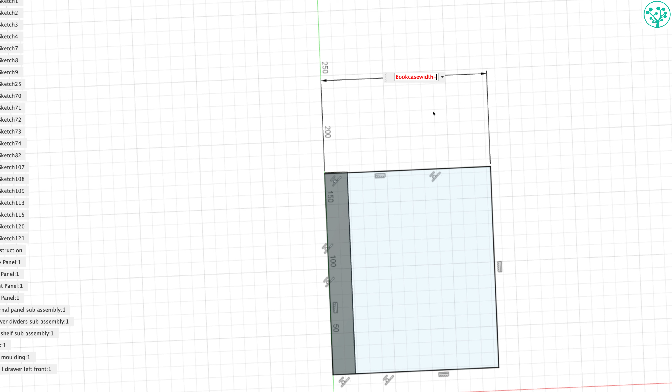Now we need to look at the back of this here, and I do want to give that a dimension. So I'm going to come into my sketch dimensions tool at the top here, click on that top line and raise it up, and I'm going to call this the bookcase width. Now remember, on our bookcase we put a back panel on here that was 12 millimeters thick, and that's set. No matter how big this bookcase goes, my back panel will always be 12 millimeters thick.

So I'm going to take away from my bookcase width 15, so it allows that back panel and gives me a bit of clearance there in the back of the bookcase. Bosh. So that gives me my distance of 250, and as my bookcase width resizes, that will always resize as well, and will always be 15 millimeters from the back. So I can now finish the sketch.

So now we're going to give this some thickness. Come up to the create command, select the extrude command, or press E on your keyboard. We want this to be a new component. So let's select what we want to extrude. Well, it's that face. Now as always, it's missed out that part where the intersect line is, so remember to select that as well. And now drag the arrow in the direction.

And you can see this now wants a negative number. It says -20 at the moment. If I dragged it the other way, it wants a positive number. And very often I type in there just stock thickness, forgetting the negative number, and it sticks out from the drawer, not in. So minus stock thickness, and then okay.

We now get a new component down here, and you can see that those two boards are intersecting. And if you've made dovetails in the past, you know that's exactly how you would size that board. So we're in reasonably good shape there, I think.

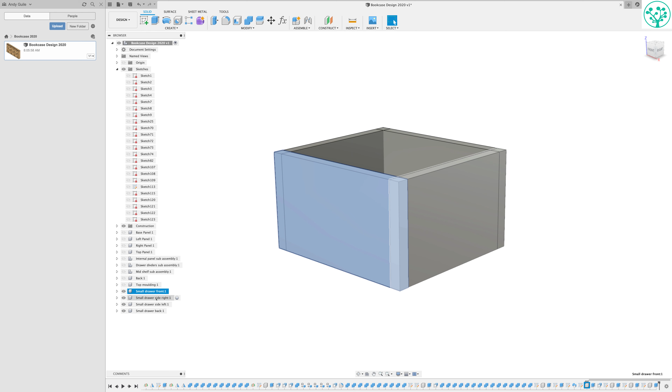I've just renamed those because the convention was getting a bit messy. So I've now got a small drawer front, a small drawer side on the right, a small drawer side on the left, and a small drawer back. Happy days. Now let's come back in and unisolate everything else. Remember, we're working from the front, so right click on the front, unisolate, and our cabinet now comes back, and you can see that our drawer is fitting in there reasonably well.

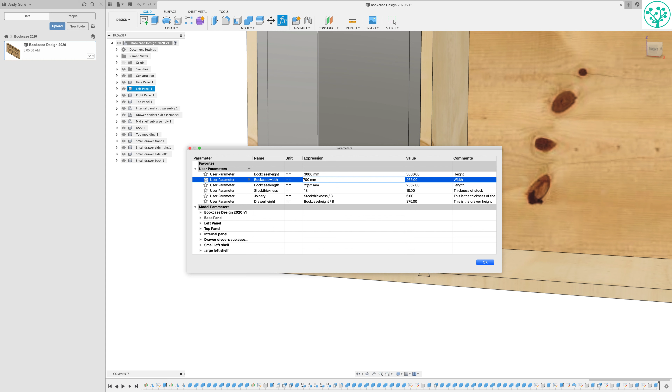Let's check our constraints are working. So let's make this 3,000 millimeters high. Let's make it, slow today, Fusion, 700 millimeters thick for a laugh. Let's make this one, I don't know, 6 meters long. Oops, that's it. 6 meters long, and let's make the stock 25 millimeters thick. Okay.

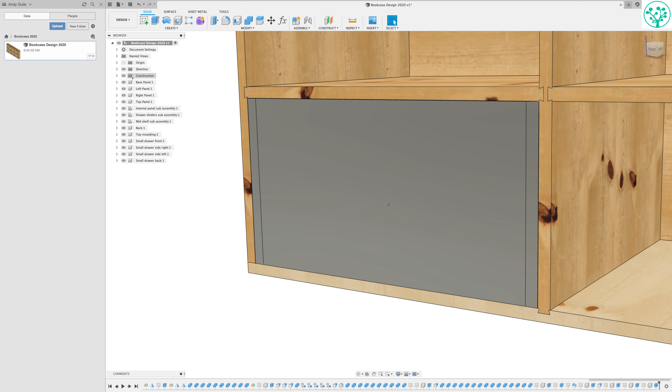And you can see all that's resized, and if I was just to turn everything off for 1 second, you can see that's resized perfectly as we would expect it to. Happy days. Now the next thing I want to do is to put in place the drawer bottom.

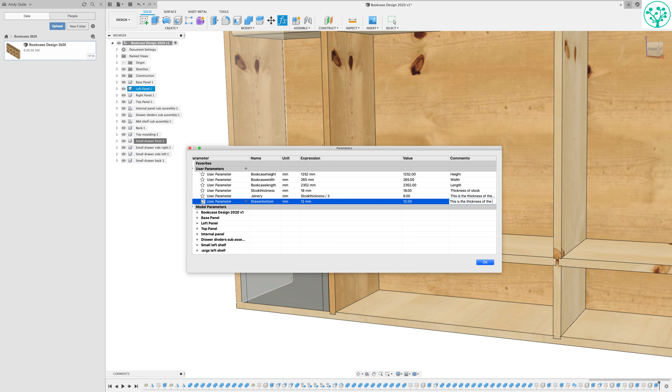I'm going to create a new constraint, and we'll just set this one, I think, to 12 millimeters. Should be thick enough, I think, for that base. This is the thickness of the drawer base. Okay, cool. Now I want to isolate everything again, so come back to the small drawer front, isolate, and then just turn the rest of the drawer on.

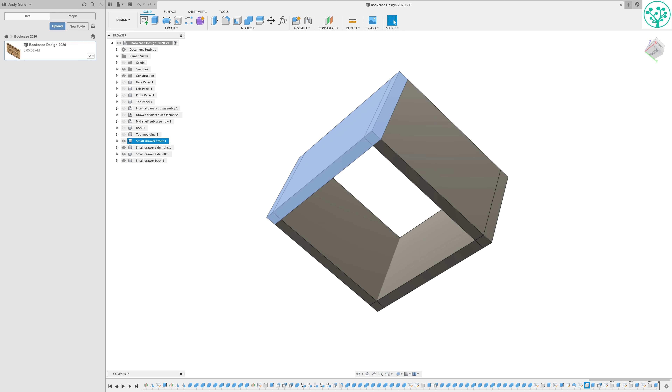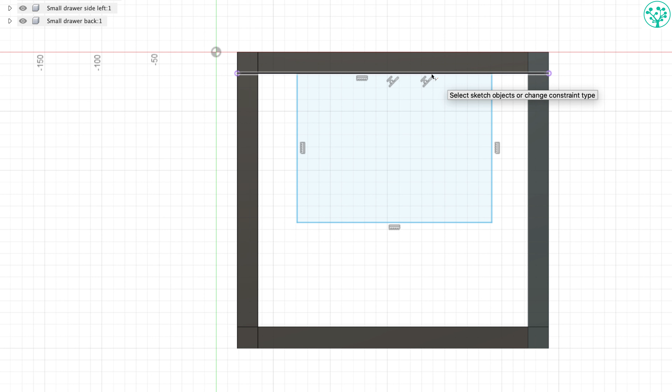What we want to do now is to create a drawer bottom in here, and we know we want it to be rebated into the side. So we're going to come in to the base of the drawer, and I'm going to create a sketch. And we're going to use exactly the same technique, coming with a rectangle, a random rectangle, and I want to constrain this to the inside edge of this drawer.

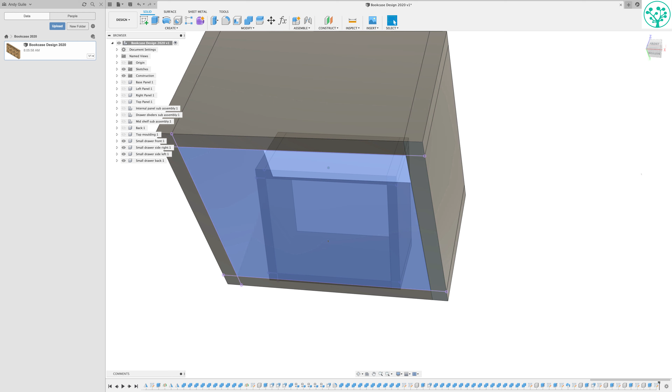So go into the collinear constraint, click on the top, click on that edge, click on there, click on that edge, click on there, click on that edge, click on there, and click on that edge. And that's now created a drawer bottom that's constrained to the inside of the drawer. And we know we can resize this by using the offset tool, which is absolutely perfect.

So we're going to finish the sketch. So I now want to extrude this up, but I want to just talk through a little something first of all. I always want this drawer to be referenced to this base, but I don't want it sat on the base. So I want to find a way of offsetting this in some way, shape or form. There's a few ways we can do that. We can use construction planes and other ways, but let's look at a really super simple way.

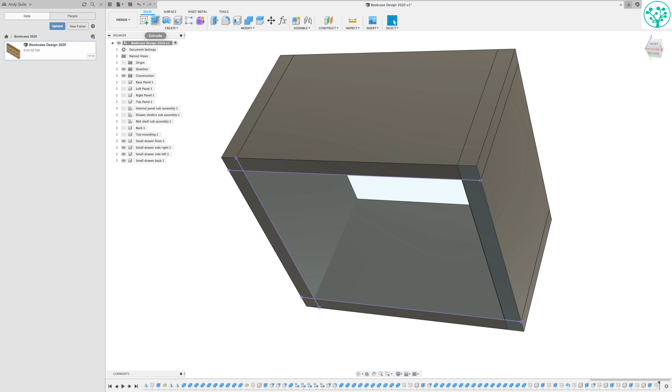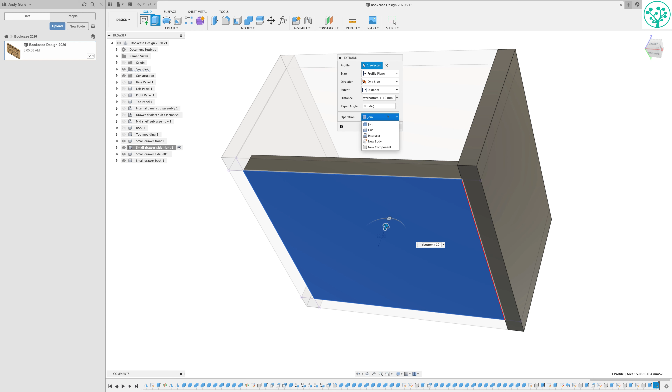I'm going to extrude this, but the way I'm going to do it, I'm going to extrude it up by the base thickness, that 12mm parameter we've just set, plus 10mm, which is the offset I want from the base. Let me show you. Click on your extrude command, click on the thing you want to extrude, which is the base panel, and push it up. So I want this to come up by, and it's a minus quantity, minus the stock, minus the drawer bottom plus 10.

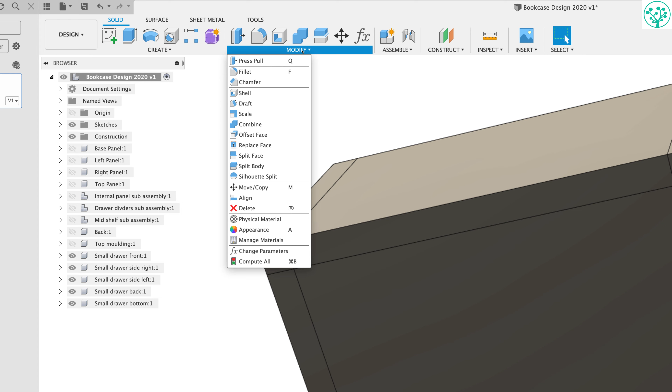Now what that'll do is give me a super thick 22mm in this case bottom, and remember we want to create a new component. Bang. We're going to call this now the small drawer bottom. Now we've got a super thick base inside here. We know that's 10mm too thick, so guess what I can do? I'm going to offset it.

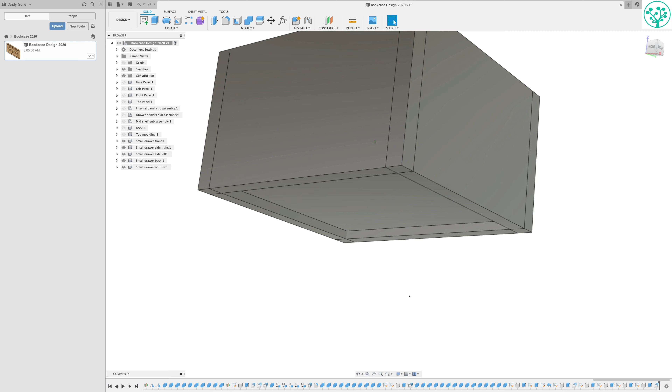I'm going to go into modify, I'm going to offset. I want to offset this base panel and I want to push that up by 10mm, minus 10mm. So that now gives me a base that's 12mm thick in the bottom of our drawer here, that's constrained by these 4 sides, so it will always be the right size, and it's constrained by this bottom face but offset by 10mm. So that base will always be 10mm from the bottom of our drawer and always be the right size for the drawer. And that's a super quick technique I find of actually doing that and making things resized.

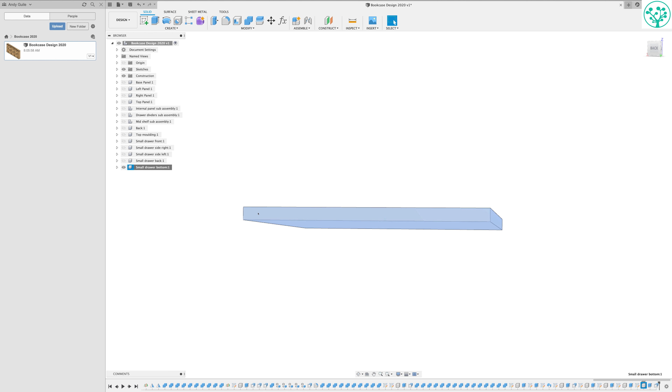So let's just work on the drawer bottom. Let's isolate the drawer bottom. Isolate. So I want this to stick into my sides by 1/3 of the stock thickness, and we know we've got a parameter called joinery that does that very thing for us.

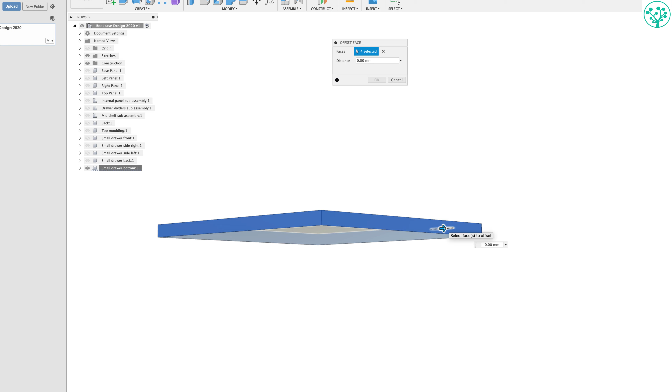So let's come to modify again. Let's come to the offset faces, and I want to offset that face, that face, that face, and that face, and I want to make this bigger by the joinery. And remember, joinery is a parameter, stock thickness divided by 3, 1/3 of the stock, which is perfect. Dunk, and then press OK.

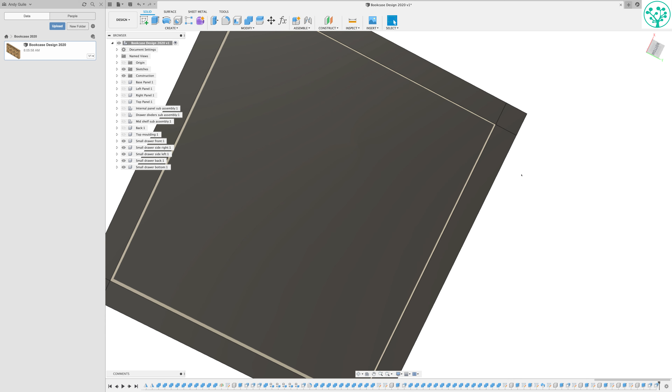So bring back in the rest of the drawer, and if I hover on the bottom, you can just see that shadow line appearing inside the drawer there that says, yep, that's bigger than we need it to be. So guess what we do now? I now want to cut the rebate, and to do that I use my old friend the modify tool.

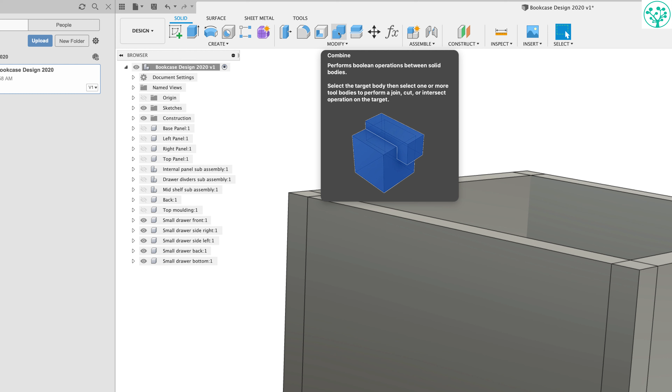Underneath modify we have this combine tool. Performs Boolean operations between solid bodies. Select the target body and then select one or more tool bodies to perform a join, a cut or intersect operation on the target, and it's the cut that we're interested in. Now this is the command I had feedback I went too quickly, so let's slow this right down again.

First thing we do is we come along and we select the tool, combine tool, and it brings up our menu. Now a target body is the thing that we want to cut into. Remember I call this the router tool. This is the thing that we want to route the rebate into. The target body is the thing we want to cut. The tool body is the thing that we want to use to make the cut. That's the router bit. And the operation, you can either join things together, you can cut them, or you can create an intersect point, and we're interested in the cut command, so we're going to cut.

My target body is going to be any one of these edges. Let's pick this one here. My tool body is going to be the base, because I want that base to cut into that side panel to make the rebate. Select. I want to keep the tool, I don't want to lose a drawer base after we spent so long making it, so we click the keep tool and OK. Now that's put that rebate inside there.

This is the small drawer back, so let's just turn everything else off for a second and look at the small drawer back, and there you can see it. And that's given me that perfect rebate that we can only dream of making with our woodworking tools in that drawer. Fantastic. Actually stopped rebate, blind rebate, I think. Perfect. So let's now do the other sides in the same way. So just so I don't get confused, I'm just going to turn off the one I've done, so I'm turning off the small drawer back there.

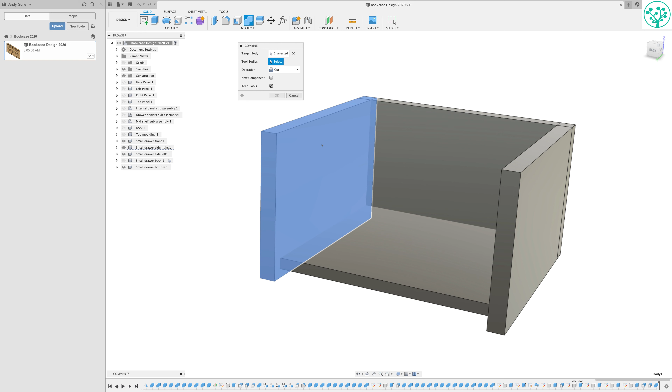Okay, now I'll come back to modify again, select my combine tool, or right click on your mouse and you can reuse the short command, that repeat combine here. Same thing, gets you to the same place. My target body is going to be this side. The tool body, the router bit, is going to be the base. It's remembered that I'm using cut commands, and it's remembered I want to keep the tools, which is great, but always check that. Okay. We now need to do this back piece.

Right click, repeat combine. My target body is that back panel. My router bit, my tool body, is the base panel. I want to cut and I want to keep the tool. Click. Right click, repeat combine. My target body is that side panel. My tool body is my base panel. My operation is cut and I'm keeping the tool. Okay, bang. And now I bring that back in there, I've now got pretty much the basics of the drawer.

Turn off the small drawer bottom. And you see that? I've got a beautiful rebate all the way around inside that drawer, which is pretty much what we want. Happy days. So we now bring everything back inside our unit. Now I want to treat this drawer as a subassembly, so I'm going to come in and make a subassembly out of this lot now.

I'm going to right click here on the top, bookcase design, and I'm going to click on new component, and that gives me a new component. There's nothing inside that component, but it gives me a new component. And I'm going to call this one the small drawer left. And I want to drag these parts, so I want the front, the right panel, the left panel, the back panel, and the bottom panel. I'm just going to drag those down into that component. And now I've got a single drawer component that we can manipulate. Happy days.